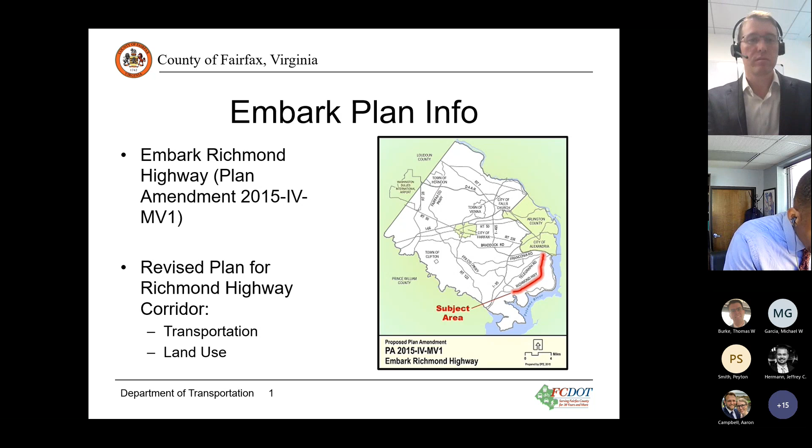In 2018, when that plan amendment was approved, the board directed staff to develop a funding plan for the transportation infrastructure improvements recommended in that plan.

Here is the URL link to the county website. If you want to check that out either during or after the presentation, all the proposed projects are there.

There have been a couple phases of this project so far, and there will be additional ones after this. But right now we are trying to do stakeholder engagement, trying to get feedback from the community on what we have so far.

So the first step for staff was just identifying projects, casting a wide net, looking especially in those area plans. The graphic here is the transportation improvement recommendations for the Penn Daw Community Business Center that might look familiar to people involved with Embark. We also looked at the county's bicycle master plan and countywide trails plan, which also make recommendations for the corridor, and looked at missing sidewalks in the immediate vicinity of those community business centers and around the planned BRT stations, which are typically right in the middle of those CBCs.

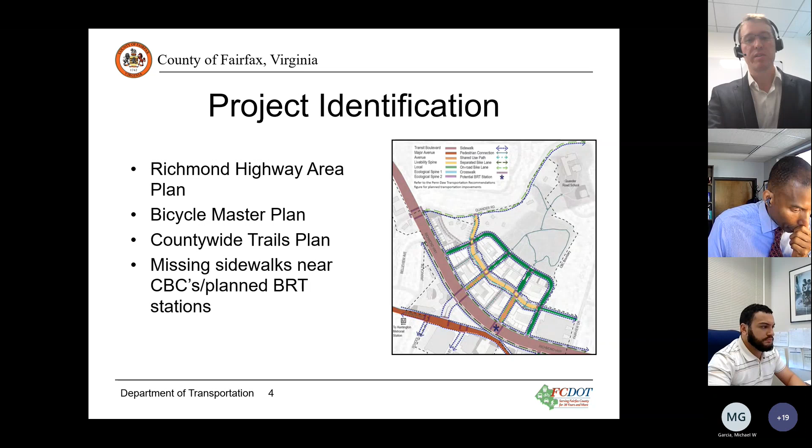So we did some project vetting. In some cases, the plan recommendations were a little bit unclear or sometimes even conflicting from one plan to another, so we had to reconcile and try to figure out which improvement was really intended. We also vetted those projects for relevance to this area.

Now that we're at stakeholder engagement, we're trying to get feedback on the overall project. Do we have the right size? Do we have the right scope, as well as individual projects that people like or that they see potential issues or challenges with? We're also here to answer questions, and our hope is that at the end of this process, we will be able to finalize or at least consolidate this list of projects.

Once we have a more solid set of projects, the next phase would be to actually develop the funding plan, to identify potential funding sources and potential mixes of funding sources to implement the projects. That would require additional community outreach and eventual Board of Supervisors action.

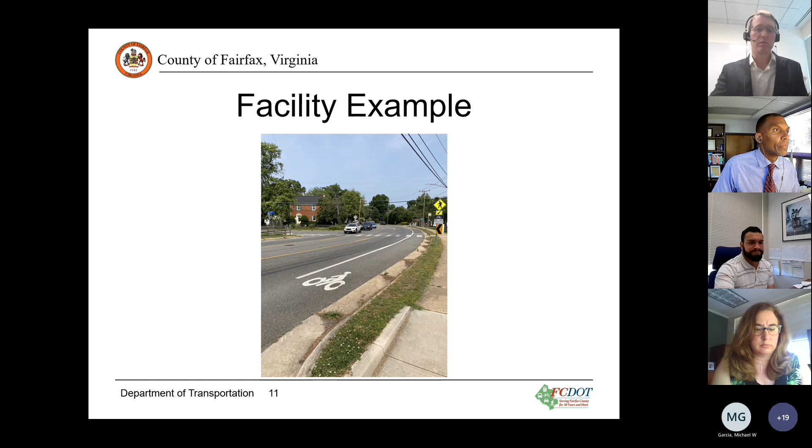And lastly, grid of street. This is a somewhat less common one, but there are a bunch of these planned for the community business centers on Richmond Highway. They come in a few different varieties, but all of them accommodate vehicles and accommodate active transportation users in some way. The facility may vary, and they usually have development pretty closely abutting, in a way that may not be as typical.

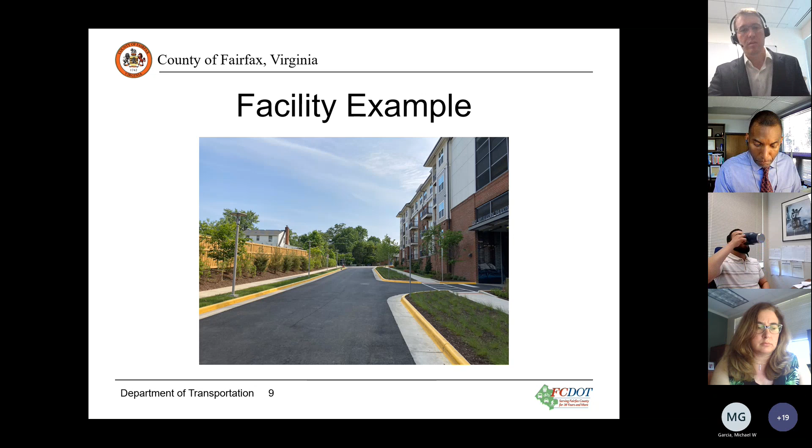Now we're going to jump into the specific project list. First are sidewalks, in the immediate surroundings of the community business centers and the BRT stations. We're going to start going from north to south in the corridor.

Here's the North Gateway Community Business Center area. Here is Richmond Highway, and here is Fort Hunt Road. You can see a handful of missing sidewalk or trail links that were identified.

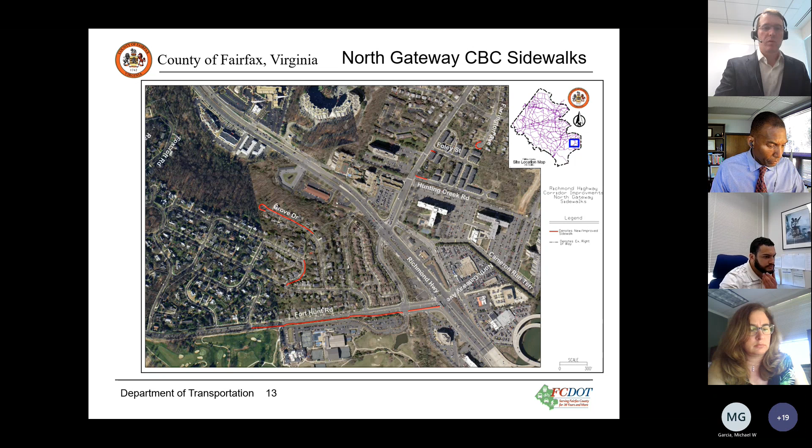The next one is the Huntington Transit Station area. You can see here the Huntington Metro parking lot and North Kings Highway. This is planned as the location for the northernmost bus rapid transit station, and again here we've got a few streets with missing sidewalk links.

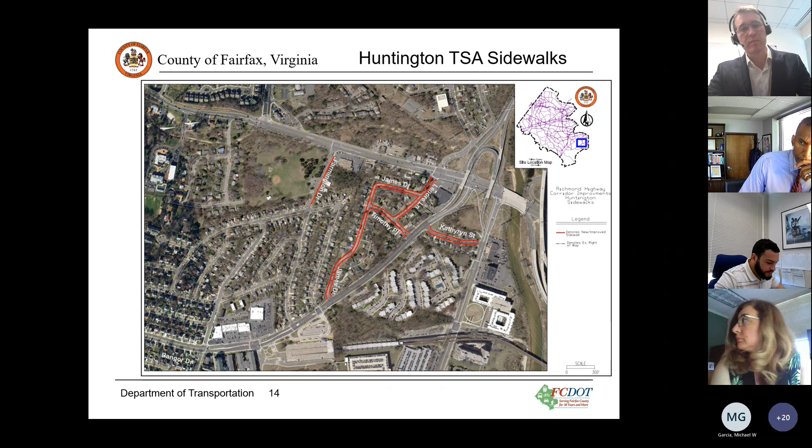Next is Beacon Groveton Community Business Center. Again, we've got Richmond Highway here, Beacon Hill Road here, and Southgate Drive here. There's a larger number of missing links in this area.

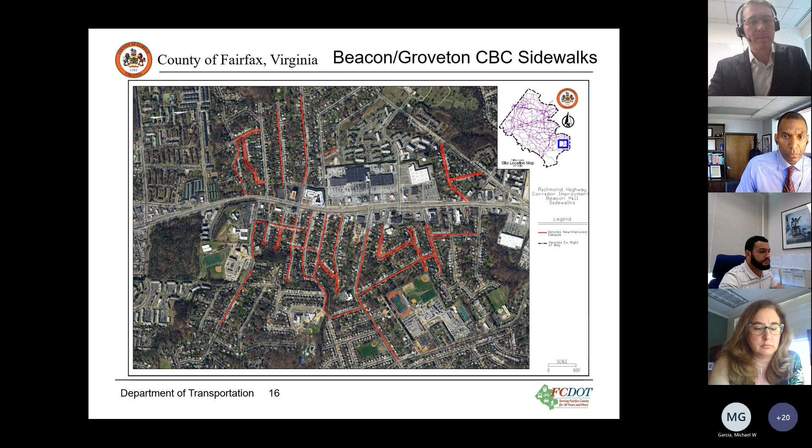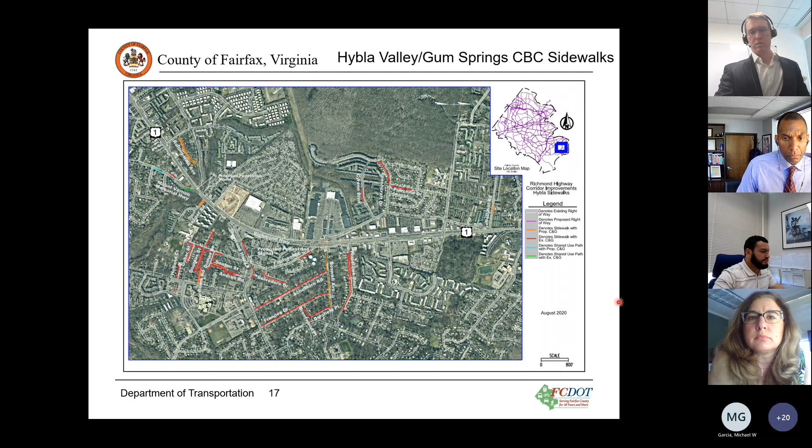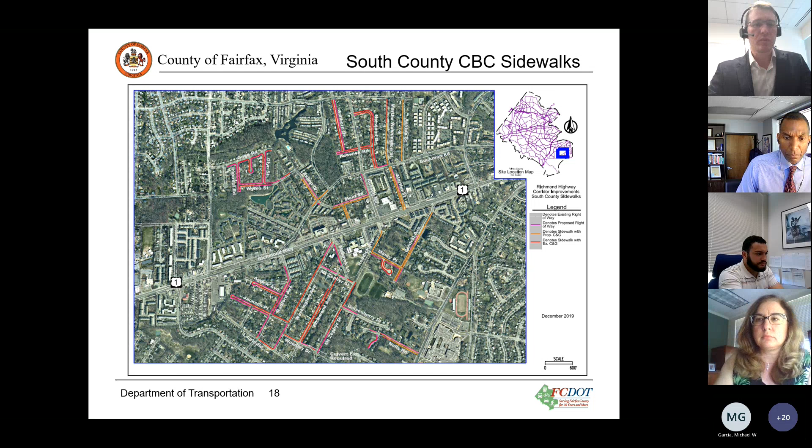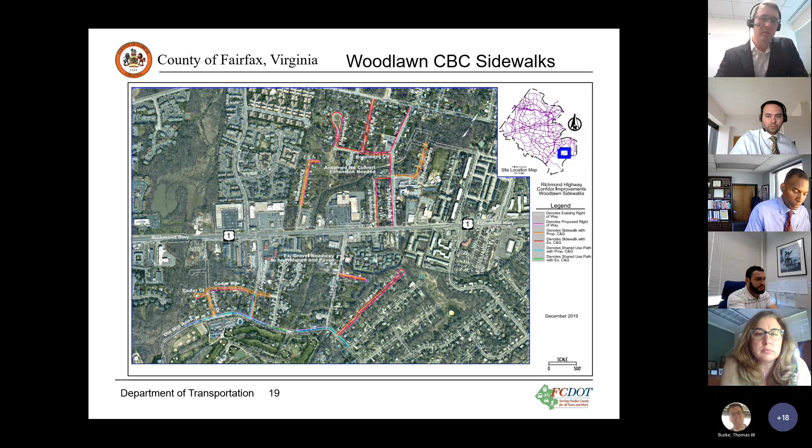I want to point out that the sidewalks shown are just outside the grid of streets; we didn't combine the two. So when Zach shows the grid of streets, that's more comprehensive, which is why you'll see differences there. I'd also point out the scale might have been a little difficult, so we're happy to go back and show you if you'd like.

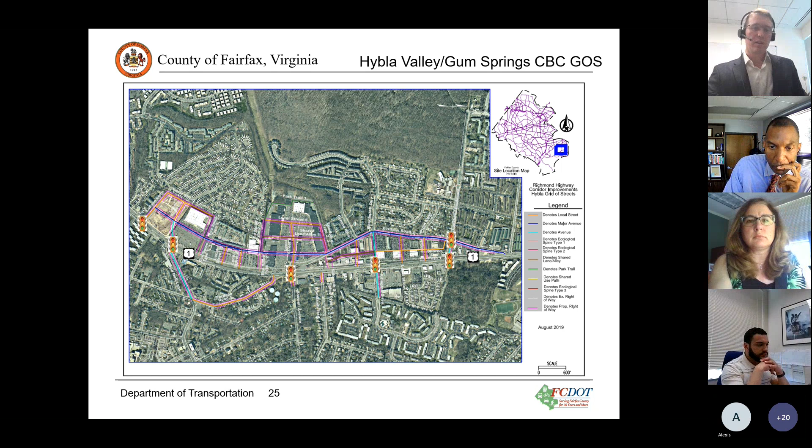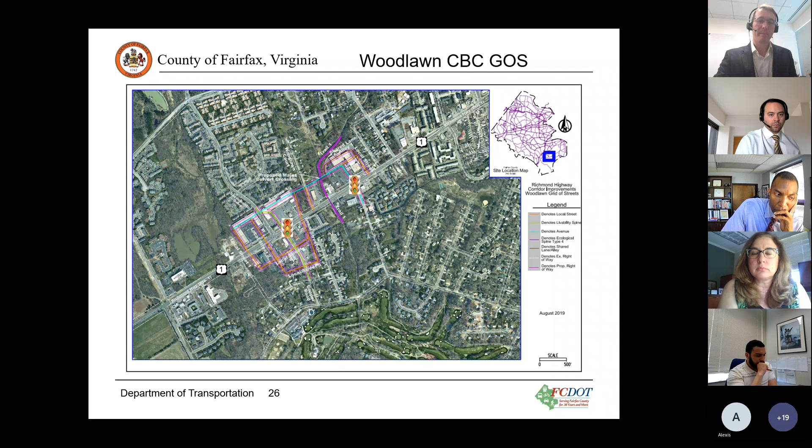All right, so we'll take your comments and questions in this particular segment as well. Again, if you want to see the cross-section of what these representative streets would look like, those are located in the comprehensive plan. So if you look for a local street, a collector, or a livability spine, those will be located there, so you can get a sense of what they look like.

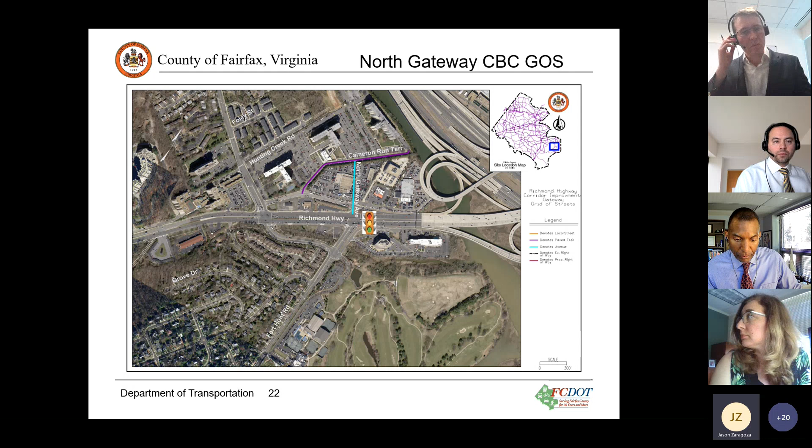Okay, thank you. I'm unclear on some of these where you have avenues and it looks like livability spines going through where there's existing shopping centers. Are we talking about completely redeveloping those areas, or just adding that? I know there was one in the Groveton area, I think, which showed it kind of going through where there's currently the Giant, and then the Woodlawn one, yeah, so right there, that livability spine is going through where there's an existing store.

Is that am I looking at that correctly? Yeah, so I would definitely refer you to the Richmond Highway Area Plan. That has redevelopment options for these community business centers, shopping centers, you could also say. So the idea was that when that redevelopment happens, these grid streets would be built or something similar to them. These aren't precise locations really, they're more conceptual. So yes, those locations are right, but this isn't something that would happen before that redevelopment.

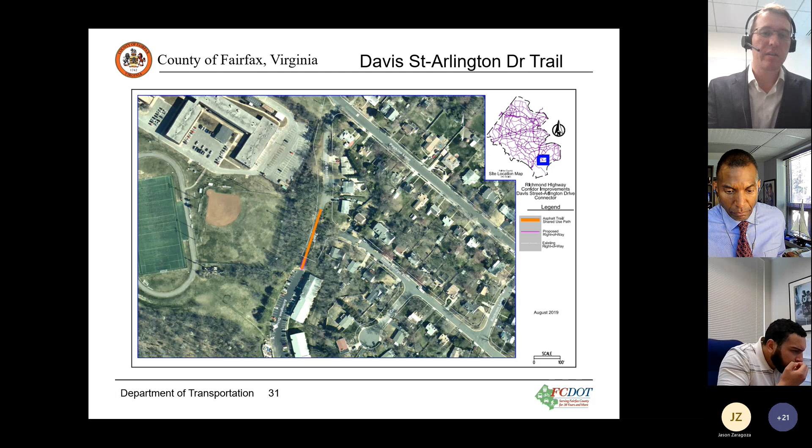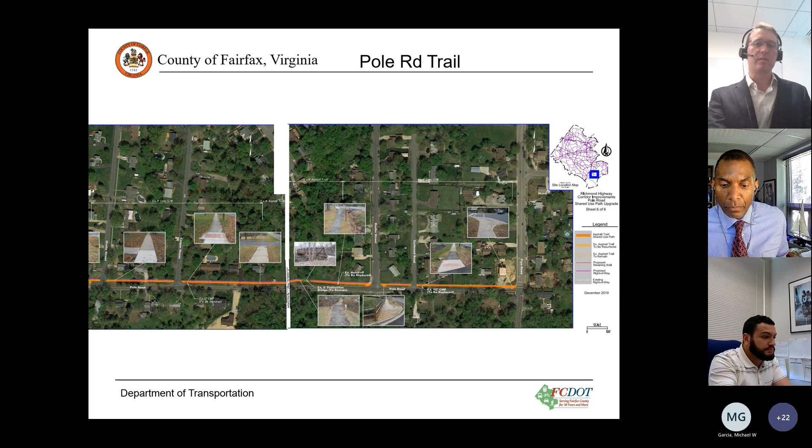I just want to make sure everyone knows we showed 3 of 8 representative projects in the area. So if you look through the sheets and the list and see that one's missing, or think one should be added, changed, or modified, let us know so we can work through that and augment the list of projects. So with that, I see Alexis's hand is up. Tom, can you enable? There you go.

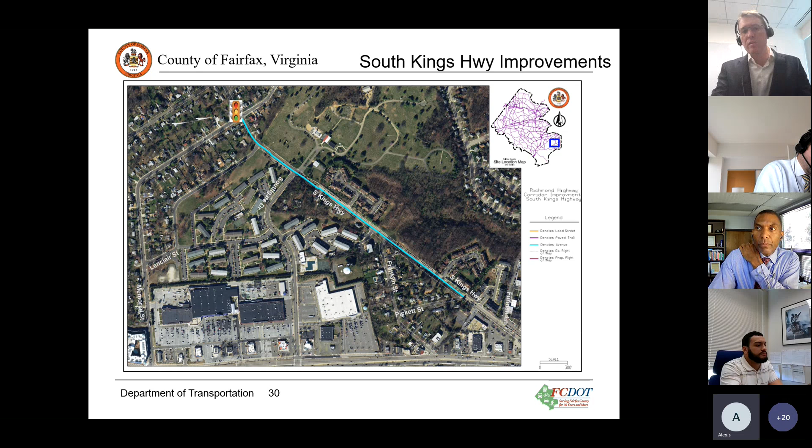Hi again. On the South Kings Highway Trail, you said it's going to start at Pickett. I ask because on the south side there's a sidewalk that ends at a driveway into the shopping center, and then there's just vegetation, no sidewalk, until Pickett. So will this trail connect all the way to where that driveway and sidewalk end, or will there be a gap between the shopping center and Pickett?

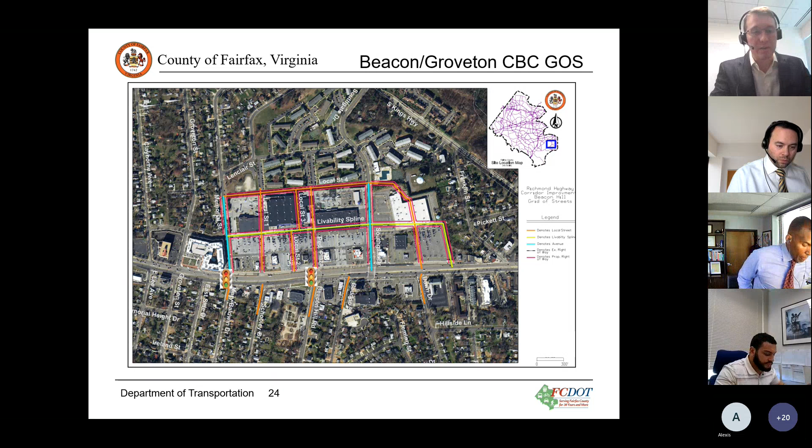Yeah, I'm familiar with the area you're talking about. I think the thing to highlight is that the intent was for the standalone trail projects to pick up outside of the community business centers. The idea was to have complete streets on the entire grid within the community business center, and then pick up outside. But looking more closely at the Penn Daw Community Business Center, I'm not necessarily seeing that, so that's a good comment and something we can look into.

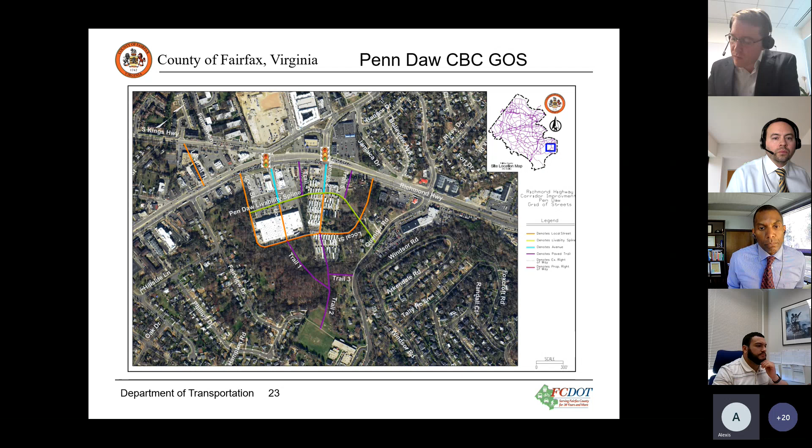One other quick comment on that stretch of South Kings: a lot of people cross along that section from the residences on the north side to the shopping center on the south side, and some crosswalks would help along South Kings Highway. There are a number of intersections where crosswalks could go, so it would be great to get some of that infrastructure included as part of this. Thanks. Thank you. Thank you.

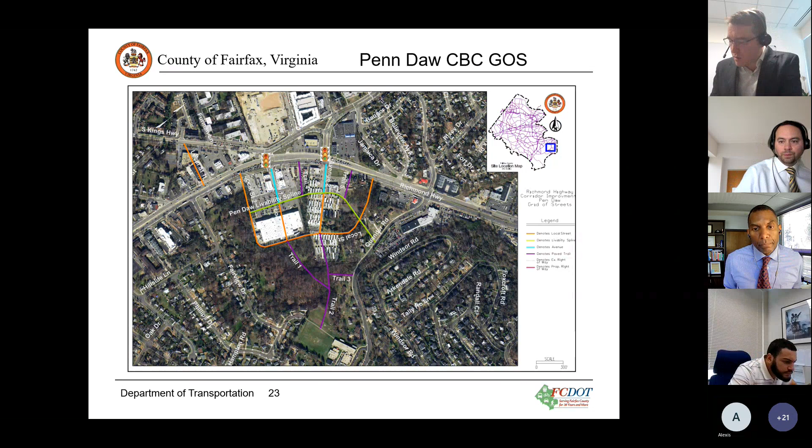Okay, seeing no more comments or questions, Zach, let's move to the last section.

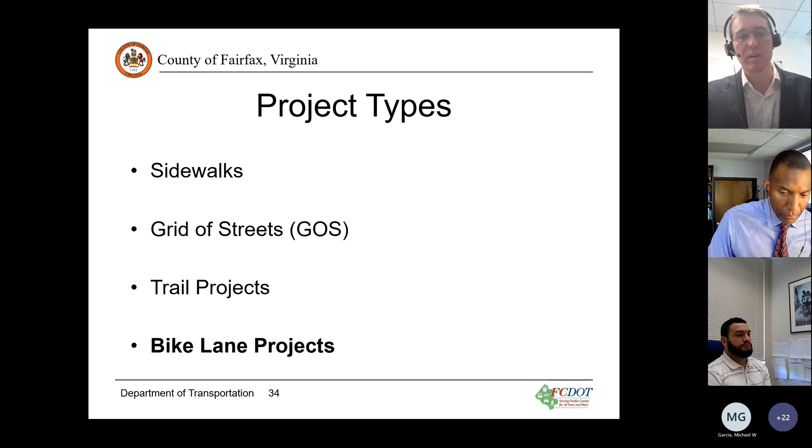The last project type is bike lane projects. It's worth noting that we have some A/B alternatives for these. Option A could be achieved entirely or mostly within the existing roadway if space was repurposed for the bike lane, and option B would be used if it's determined during design that option A isn't desirable, so extra right of way would be added for the bike lane while keeping what's currently there. Just like with the trails, for the sake of time, we're just going to look at a few of these.

Okay, the first one is the Memorial Street bike lane. The proposal is to implement this from the edge of the community business center to South Kings Highway. This recommendation comes from the Richmond Highway Area Plan and the Bicycle Master Plan.